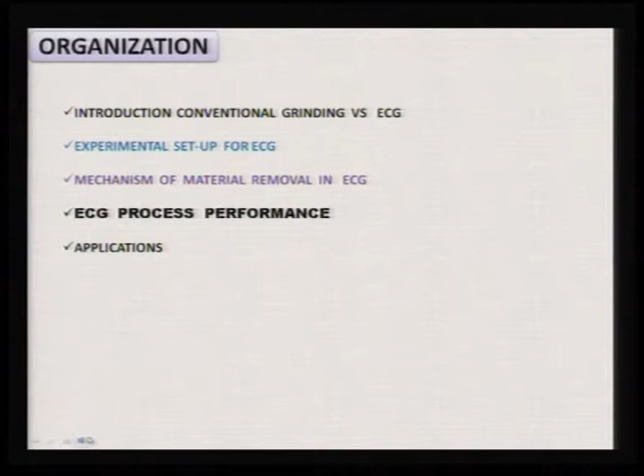Introduction to conventional grinding versus electrochemical grinding.

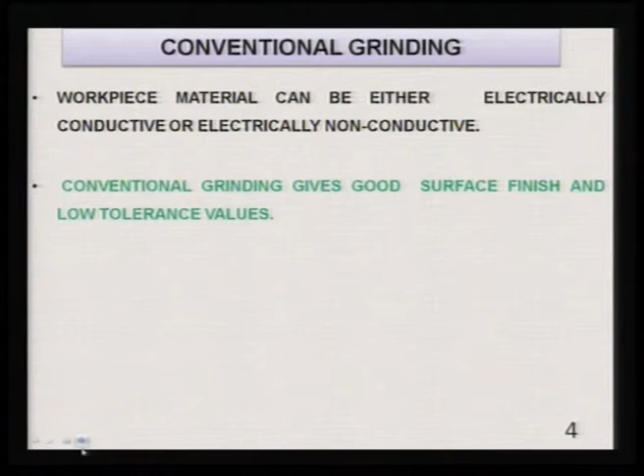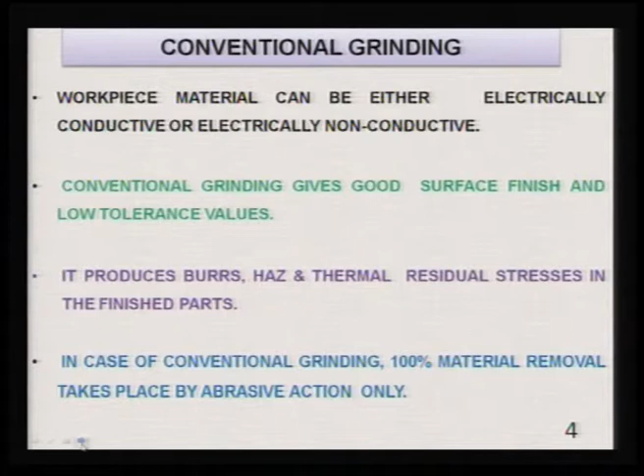In conventional grinding, as we all know, workpiece material can be either electrically conductive or electrically non-conductive. That condition is not required, that the workpiece should be electrically conductive. Conventional grinding gives good surface finish and low tolerance values. It produces burrs, heat affected zone (HAZ), and thermal residual stresses in the finished parts, and the finishing rate is okay. In conventional grinding, 100% material removal takes place by abrasive action only.

In case of electrochemical grinding, as you will see in this figure, on the left side conventional grinding is shown, where you can see rotation of the wheel, workpiece, and depth of cut. On the right side the figure shows electrochemical grinding, where you can see a decreasing electrolyte gap. Here electrolyte is supplied through this nozzle kind of arrangement, and electrochemical dissolution takes place as well as grinding. So both reactions keep going on simultaneously; we will discuss them shortly.

A small mechanical contact arc is partly responsible for the long wheel life experienced by electrochemical grinding users. That means in electrochemical grinding the life of the grinding wheel is much larger than in conventional grinding. You can see here that the contact arc is much larger in case of conventional grinding as compared to electrochemical grinding. That is why the grinding wheel life is much larger in electrochemical grinding compared to conventional grinding.

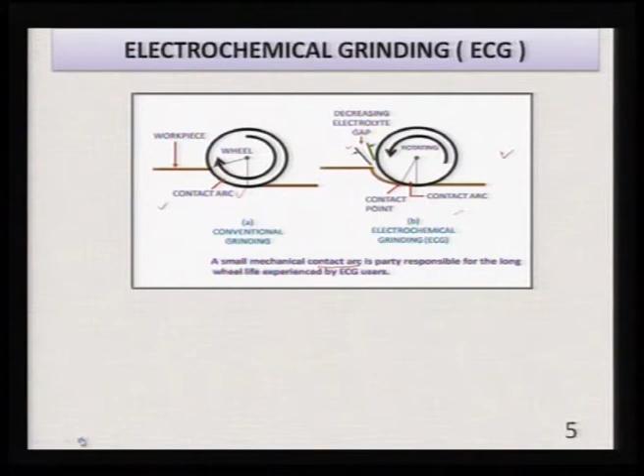In ECG, the workpiece should be electrically conductive. This is the first basic requirement, because as I will show, the workpiece is made... sorry, workpiece is made anode, not cathode, and grinding wheel is made as the cathode. So both grinding wheel and workpiece should be electrically conductive.

Electrolyte is used during electrochemical grinding, and it is supplied with the help of a nozzle as shown on the right hand side of the figure. After proper filtration, the electrolyte can be reused or recirculated, as we do in case of electrochemical machining.

For electrochemical grinding, the wheel bonding material should be electrically conductive, as I just mentioned, since it is made as cathode. So the material should be electrically conductive and it forms part of the electrical circuit of the electrochemical grinding process.

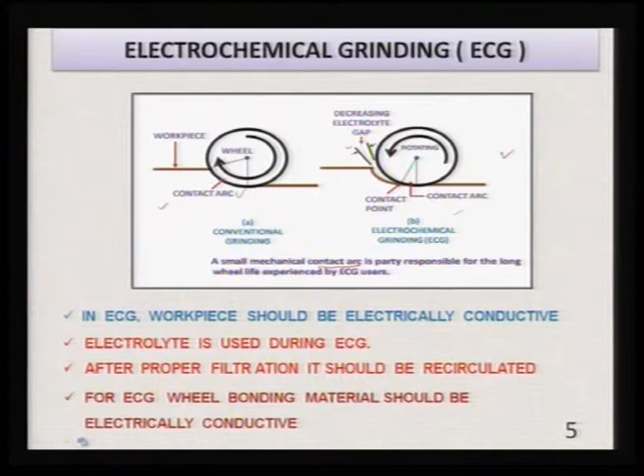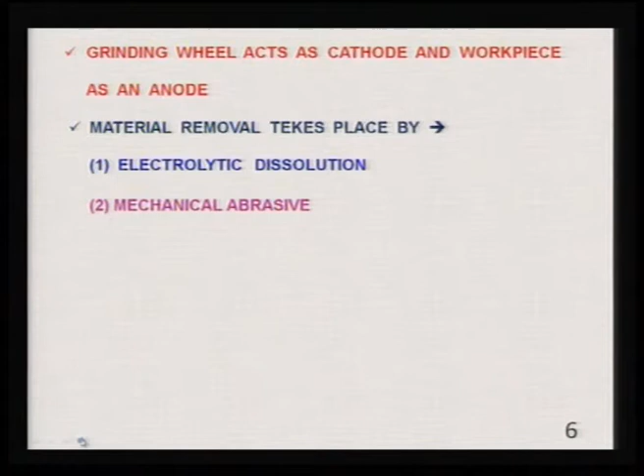Grinding wheel acts as a cathode and workpiece acts as an anode. This is very similar to, or same as, electrochemical machining, where the workpiece is made anode and the tool is made cathode. Here the grinding wheel acts as the tool. Material removal takes place by electrolytic dissolution and mechanical abrasion by abrasive particles, which are part of the electrochemical grinding wheel.

It is found experimentally that mechanical abrasive action accounts for around 10% of total material removal, while the remaining 90% is due to electrochemical dissolution, as compared to ECM where 100% of removal is due to electrochemical dissolution only. Higher wheel life is obtained in electrochemical grinding as compared to conventional grinding wheel life.

Common electrolytes used during electrochemical grinding are the same as used in electrochemical machining: sodium chloride, sodium nitrate, and others can also be used depending upon the combination of tool and workpiece material.

Let us see the experimental setup of the electrochemical grinding process.

Various features of an electrochemical grinding setup are shown here. You will see the electrode, that is the cathode, the conductive or grinding wheel that acts as the cathode, and you can clearly see the protruding abrasive particles which contribute to the abrasive action in material removal. Here the electrolyte, sodium nitrate, is supplied at the inter-electrode gap. Here is the workpiece to be ground, and in this case it is a single point turning tool used as the workpiece.

The workpiece is made anode, as shown, and the grinding wheel is made cathode, connected to the negative terminal of the power supply, while the workpiece is connected to the positive terminal. The workpiece is held on the work table, and the work table and grinding wheel are in the machining area or tank containing the electrolyte.

Abrasive particles are written as insulating abrasive particles, because all abrasive particles—alumina, silicon carbide, etcetera—are electrically non-conductive. So they form a certain minimum gap which does not permit short circuit by contacting the tool and the bonding material of the grinding wheel.

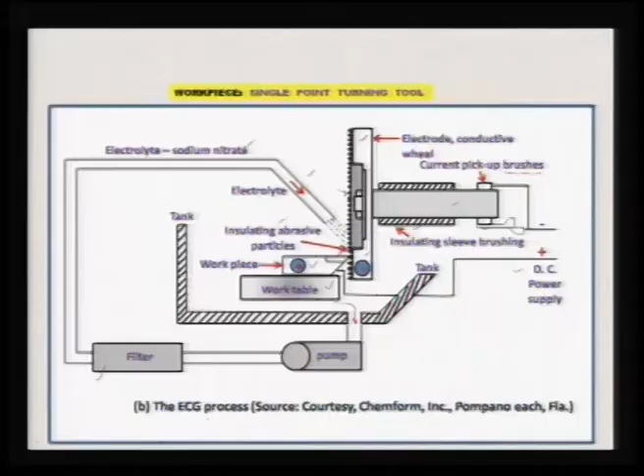The tank is the machining zone where electrochemical grinding takes place. Electrolyte is supplied here with the help of a nozzle between the tool, that is the grinding wheel, and the workpiece. After being used, the electrolyte comes out and is recirculated with the help of a pump, but before recirculation it has to be properly filtered or cleaned using various sizes of filters.

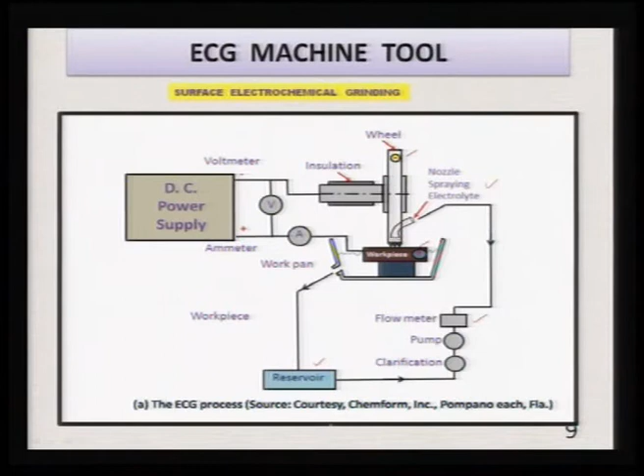Let us discuss briefly the mechanism of material removal in electrochemical grinding. This is a hybrid process, as I have already mentioned in couple of lectures, where we have combined electrochemical machining and grinding, both processes.

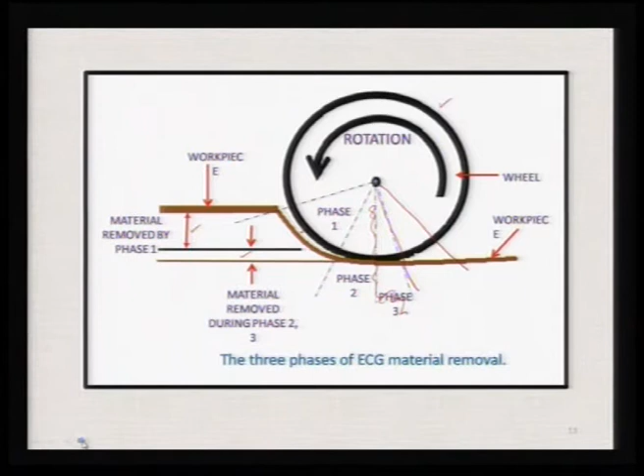The material removed in zone 1 is shown here, where material is removed by electrochemical dissolution only. In zone 2, material is removed by both processes—electrochemical dissolution as well as abrasive action. This clearly gives the picture of the 3 zones: zone 1, zone 2, zone 3.

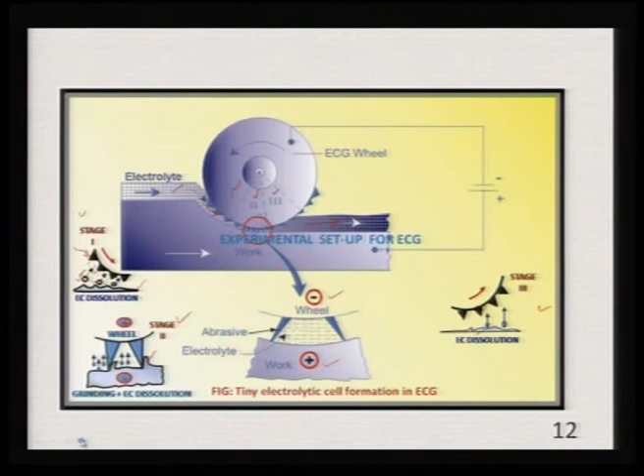But in zone 3, as you see on the right side, there is no contact between the abrasive particle and the workpiece surface; there is only electrolytic dissolution. So material is removed only due to electrolytic dissolution in zone 3, with no abrasive action. The same thing is described in the following slides.

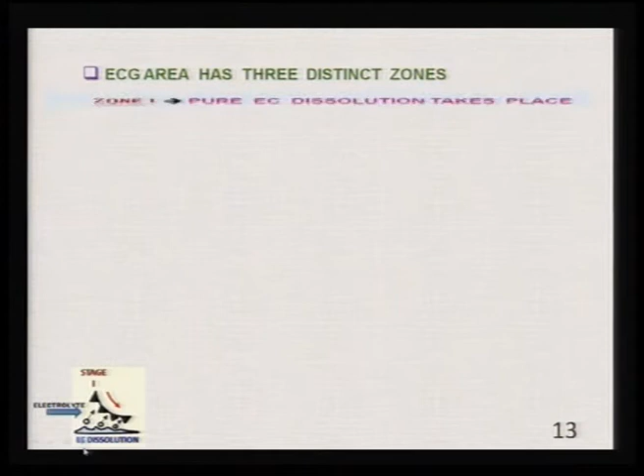ECG has 3 distinct zones, as I have shown you. In zone 1, pure electrochemical dissolution takes place, as you can see in the figure, with no abrasive contact with the workpiece. Wheel rotation helps in drawing the electrolyte into the machining zone, because the wheel rotates in the direction shown by the arrow, so electrolyte is drawn into the gap between the wheel and the workpiece, apart from whatever pressure it is being supplied at.

Then contamination in zone 1 takes place by reaction products and gases, because electrochemical reaction is occurring. So ferrous hydroxide or ferric hydroxide will be formed if iron is being machined. This ferrous or ferric hydroxide, along with the gases evolved—since we know oxygen gas is evolved at the anode while hydrogen gas is evolved at the cathode—all these gases along with the reaction products will move forward into zone 2.

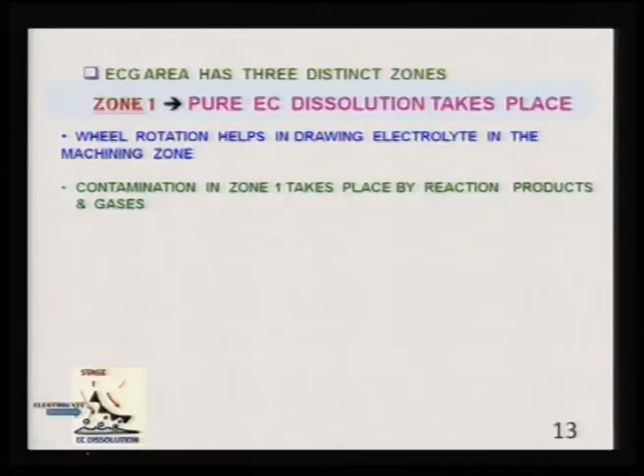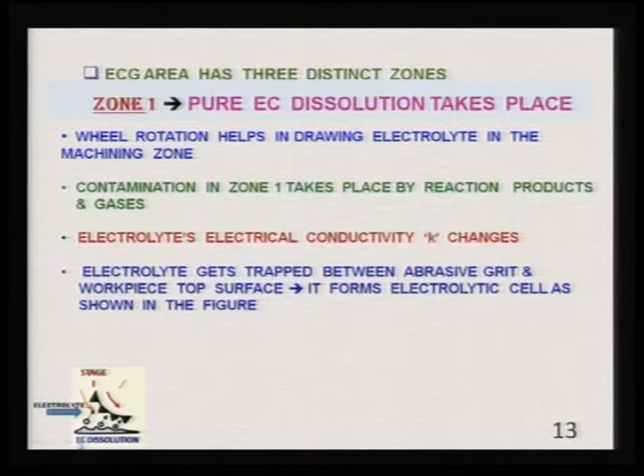Then the electrolyte's electrical conductivity will change, because apart from the pure electrolyte, it now has reaction products as well as gases, and controlling the electrical conductivity of the electrolyte becomes very difficult. Electrolyte gets trapped between the abrasive grit and the workpiece top surface, forming an electrolytic cell as shown in the figure. A small amount of material is removed in this zone, and the inter-electrode gap is comparatively large.

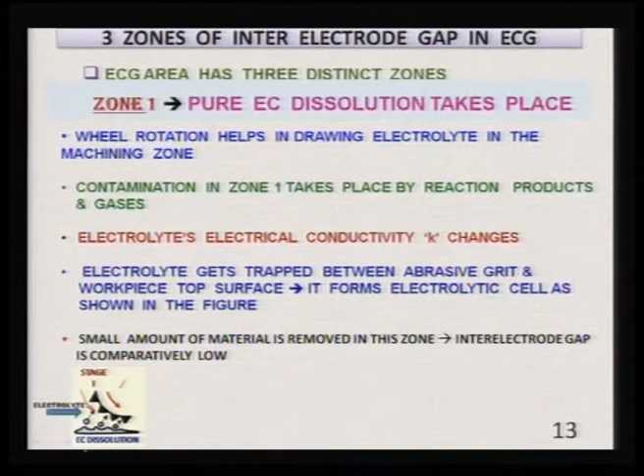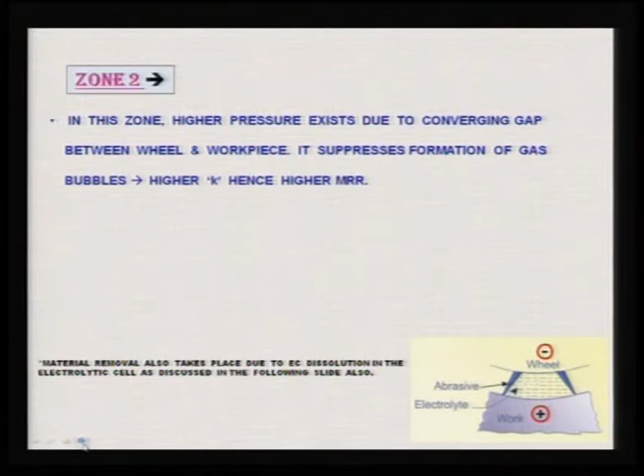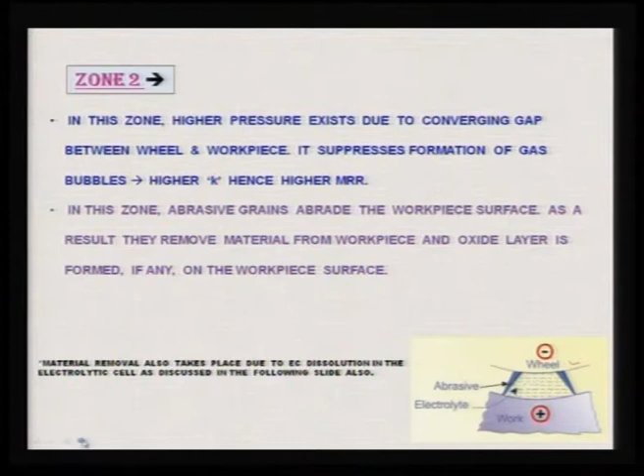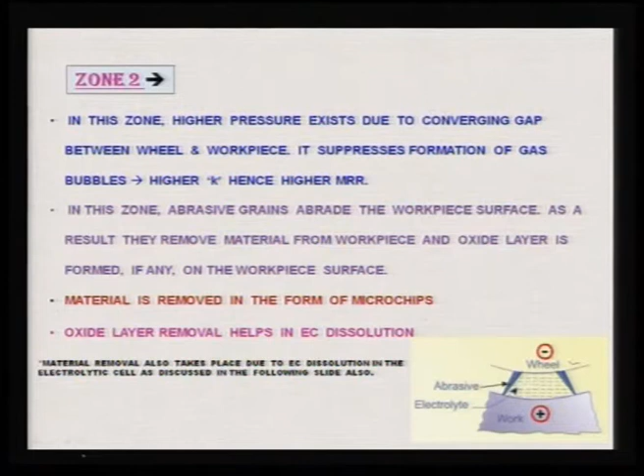In zone 2, abrasive grains abrade the workpiece surface, as you can see in the figure. As a result, they remove material from the workpiece, and an oxide layer is formed, if any, on the workpiece surface. Material is removed in the form of microchips due to abrasive action, and reaction products are formed due to electrochemical dissolution. Oxide layer removal helps electrochemical dissolution—whatever oxide layer was formed in zone 1 is removed due to the abrasive action of the abrasive particles, so the rate of electrochemical dissolution increases. Material removal also takes place due to electrochemical dissolution in the electrolytic cell, as discussed in the following slide also.

Types of electrolytes used in ECM: you can use acidic electrolyte, alkaline electrolyte, or neutral electrolyte—all these electrolytes we have discussed while discussing the electrochemical machining process.

Reactions during electrochemical machining, while using iron as anode and NaCl aqueous solution as electrolyte: electrolysis of water takes place, producing hydrogen gas evolved at the cathode and hydroxyl ions (2OH-). When iron is the workpiece, ferrous ions detach from the workpiece; they have positive charge, and electrons are also detached. Then ferrous ions and hydroxyl ions react with each other to form ferrous hydroxide.

In some cases, under certain conditions, ferric hydroxide can be formed in place of ferrous hydroxide.

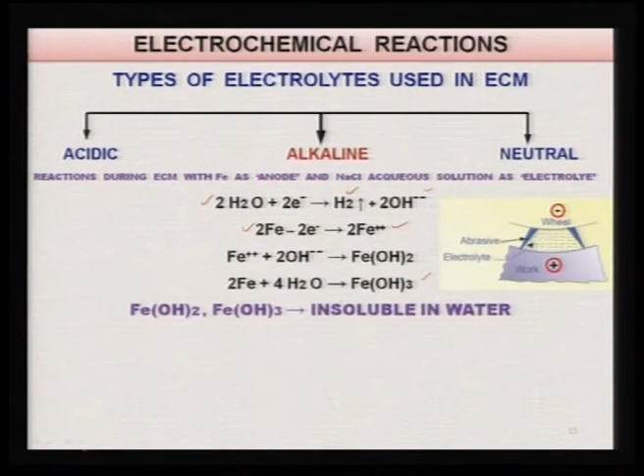Now, this ferrous hydroxide and ferric hydroxide are insoluble in water. So they remain as such, as reaction products in the electrolyte, and positive ions convert as hydroxides, ferrous or ferric, in case of iron as anode or work material.

In this particular case, the inter-electrode gap is quite low and it depends upon the projection of the abrasive particle out of the grinding wheel, normally less than 1 millimeter. The voltage applied is around 8 to 20 volts.

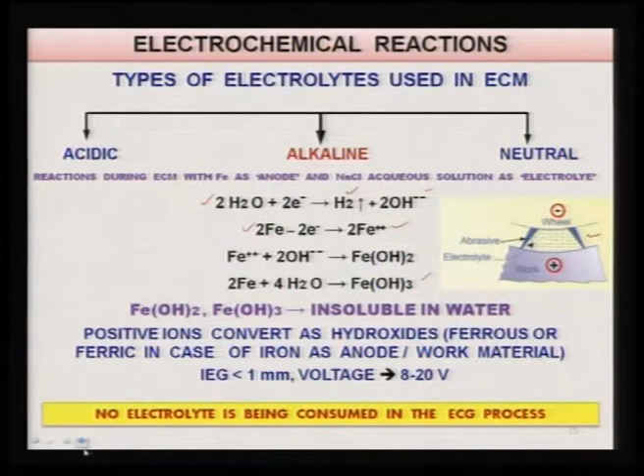We can clearly see from these reactions that no electrolyte is being consumed in the electrochemical grinding process, and this was true in case of electrochemical machining as well.

In zone 3, there is no contact again between abrasive grain and workpiece surface. As you can see, this is the workpiece surface and this is the abrasive grain, and there is no contact between the two. The wheel starts lifting off the work surface, that is why the inter-electrode gap is continuously increasing in the direction of the arrow.

Hence, material removal takes place by electrochemical dissolution only, because there is no physical contact between abrasive particle and the workpiece, so no abrasive action is taking place. Secondly, the rate of electrochemical dissolution will keep decreasing, because the inter-electrode gap is continuously increasing in the direction of the flow of the electrolyte.

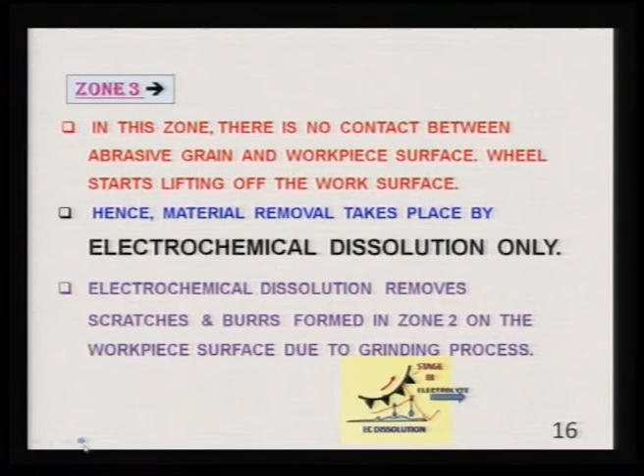Electrochemical dissolution removes scratches and burrs formed in zone 2 on the workpiece surface due to the grinding process. We saw earlier that material was removed by abrasive particle from the workpiece surface in the grinding process, causing burrs and scratches, and these are removed in zone 3. So you get a burr-free and scratch-free surface after zone 3 in electrochemical grinding. This is an additional advantage over conventional grinding.

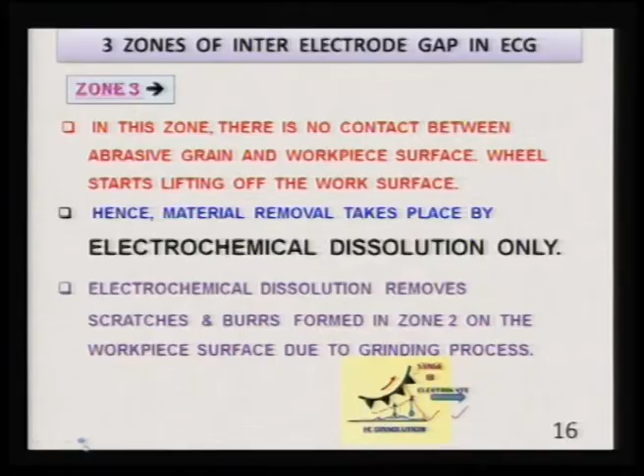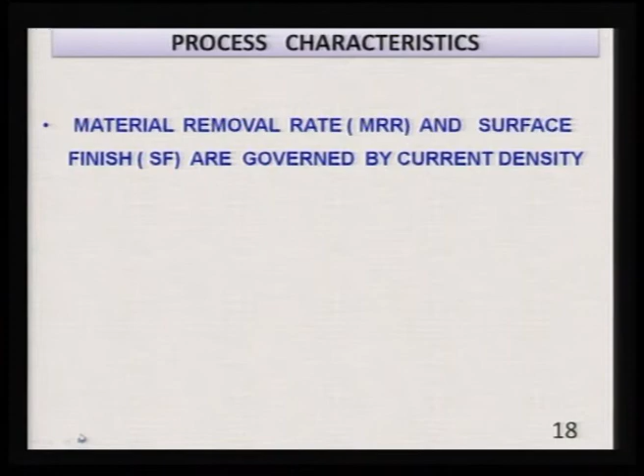Now, electrochemical process performance. Material removal rate and surface finish are governed by current density, as in case of electrochemical machining, because 90% of the total material removed in electrochemical grinding is due to electrochemical dissolution. That means current density is going to govern the material removal rate.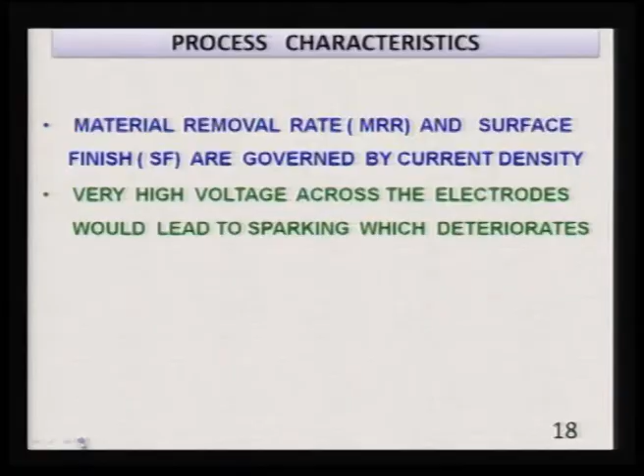Very high voltage across the electrodes would lead to sparking. So we should not use very high voltage between the two electrodes, the grinding wheel and the workpiece, otherwise sparking will take place, and this sparking will damage both the grinding wheel and workpiece, which is undesirable. It will also deteriorate the surface finish.

In case of electrochemical grinding, it should be ECG, not EGC. MRR can be as high as 10 times that of conventional grinding on hard materials having hardness greater than 65 HRC. 10 times greater MRR is a very high value compared to conventional grinding, so this is an additional advantage of electrochemical grinding.

Now, you have to control the machining conditions appropriately in electrochemical grinding also, and feed rate is one of the important machining conditions. If the feed rate, calculated from the formula given in the theory of electrochemical machining, is higher than required, then the abrasives detach prematurely due to higher depth of cut, which leads to excessive grinding wheel wear, giving low wheel life and higher cost.

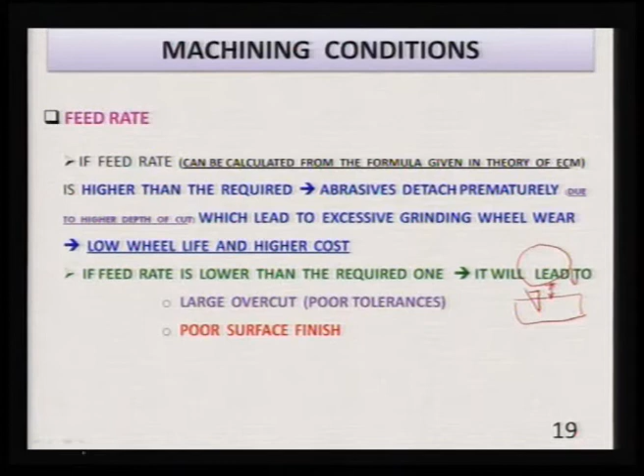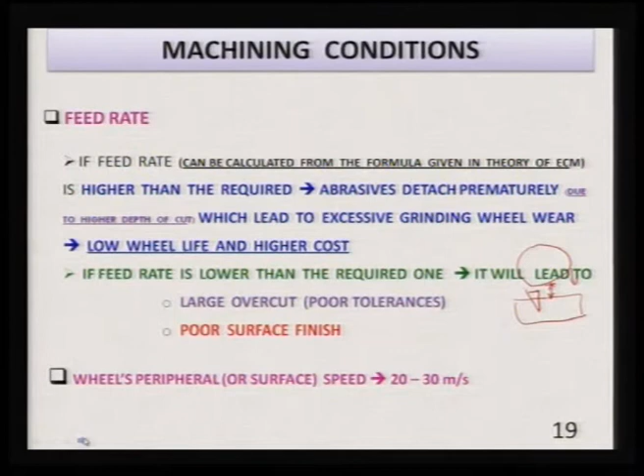And the wheel's peripheral speed normally is 20 to 30 meters per second in case of electrochemical grinding.

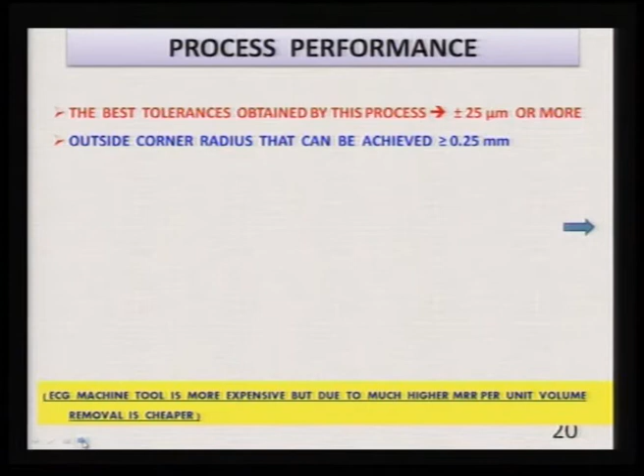Process performance continues. The best tolerances that can be obtained by this electrochemical grinding process are within plus minus 25 micron or more. Outside corner radius that can be achieved by electrochemical grinding is greater than or equal to 0.25 millimeter, that is 250 micron.

Inside corner radius that can be achieved is again the same, 0.25 millimeter, greater than or equal to 0.25 millimeter. Surface roughness that can be obtained is approximately 0.12 to 0.8 micron, it lies in this particular range.

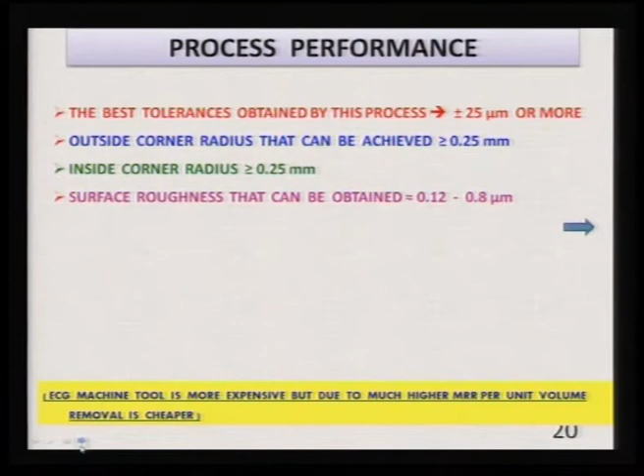Surface obtained after electrochemical grinding is free of burrs and scratches, as already explained in the earlier slide, because burrs and scratches get dissolved in zone 3 of the electrochemical grinding process by electrochemical dissolution.

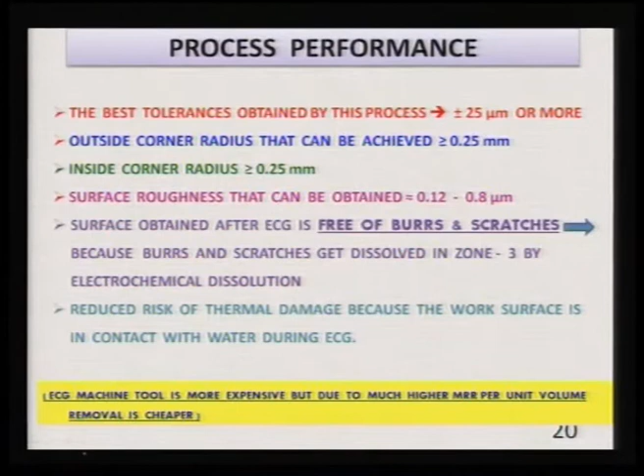Reduced risk of thermal damage, because the workpiece is always in contact with the electrolyte during electrochemical grinding, which is a solution like sodium chloride or sodium nitrate in water, and water is a very good coolant. So the temperature of the workpiece does not rise to a large extent, and there is hardly any thermal damage risk.

ECG machine tool is more expensive compared to a normal grinding machine, but due to much higher material removal rate per unit volume, removal is cheaper. Hence electrochemical grinding is cheaper than conventional grinding, especially in case of grinding very hard materials. So the cost of electrochemical grinding is less than the cost of conventional grinding.

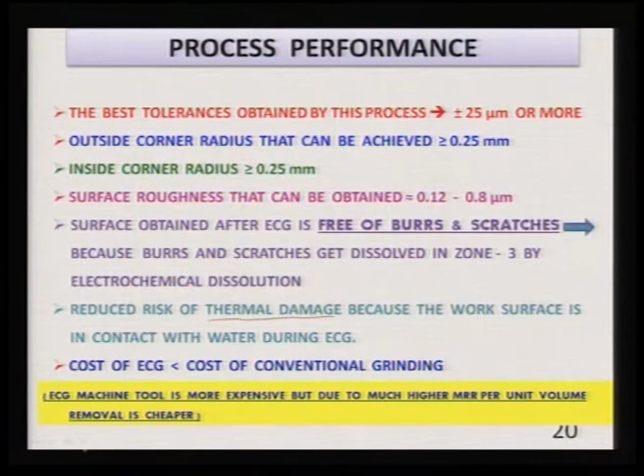The electrochemical grinding machining chamber should be made of non-corrosive and electrically non-conductive material. Power supply to the grinding wheel is given with the help of brushes, as shown in the earlier slide of the setup. However, in some cases you can use mercury coupling that can carry more current compared to brushes, but it depends on the designer.

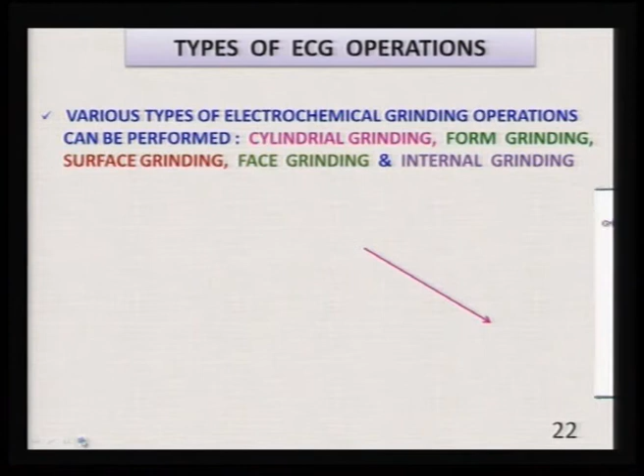Types of ECG operations: various types of electrochemical grinding operations can be performed, such as cylindrical grinding, form grinding, surface grinding, face grinding and internal grinding. You can see here clearly this is the surface grinding operation, some setup is shown.

Surface grinding is slow because of a small area of contact between the workpiece and the grinding wheel, as you can see here — it is theoretically a line contact. So the total contact area of the grinding wheel is very small, hence material removal rate and finishing rate are also low.

In case of face grinding, it is the fastest because of the largest area of contact between the workpiece and grinding wheel.

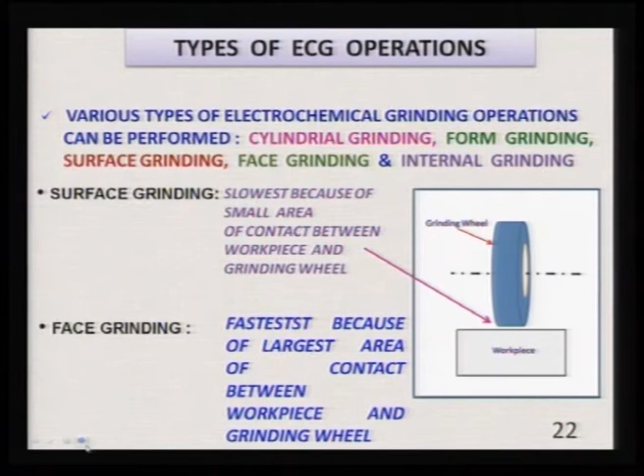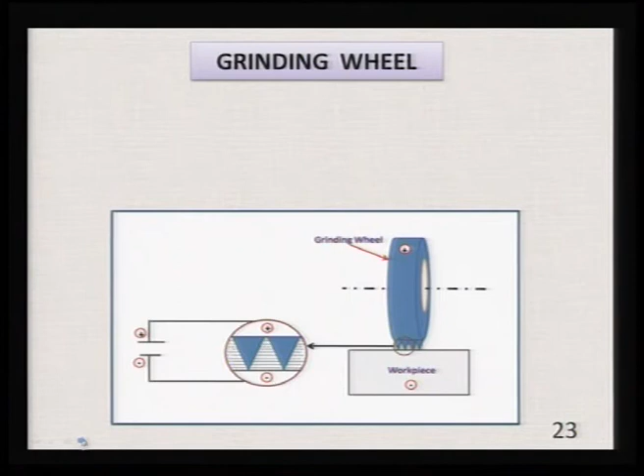Now here you can see the bonding material used for bonding the abrasive particles in the electrochemical grinding wheel, as shown over here. The bonding materials are copper, brass, nickel, because they should be electrically conductive. These materials have good electrical conductivity, so they are commonly used as bonding material for the electrochemical grinding wheel.

Now you can clearly see the role of the abrasive particles in surface grinding. These abrasive particles remove material by abrasion, while this forms the electrolytic cell. Because of this electrolytic cell formation, material is also removed due to electrochemical dissolution from this area, and the abrasive particles remove material by chip formation.

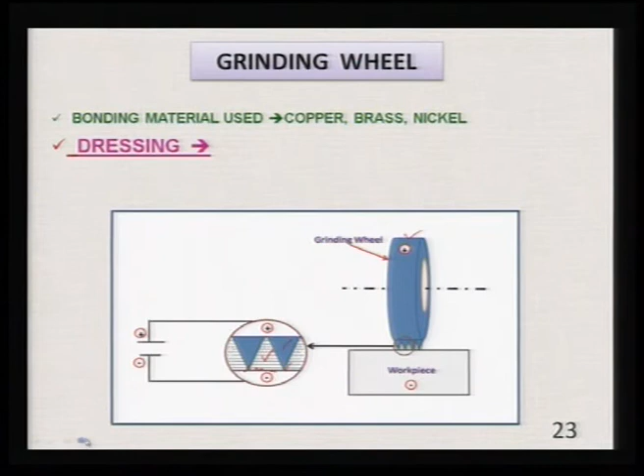Dressing is very important. It takes a lot of time to dress grinding wheels, and it costs a lot in the case of conventional grinding wheel dressing.

Now what is done in case of electrochemical grinding dressing? As you can see, earlier the grinding wheel was made the cathode, but in this particular case the grinding wheel has been made the anode, and the workpiece has been made the cathode. Now, material is removed from the anode, so in this case material will be removed from the grinding wheel which is made as anode.

As a result, whatever material was deposited on the grinding wheel due to clogging is removed, allowing fresh particles to project for the grinding operation. So that material is dissolved from the grinding wheel, and once it is dissolved, fresh abrasive particles project outside the grinding wheel and perform the grinding operation rather than the blunt abrasive particles — which get pulled out of the wheel — giving better performance of electrochemical grinding once dressing has taken place.

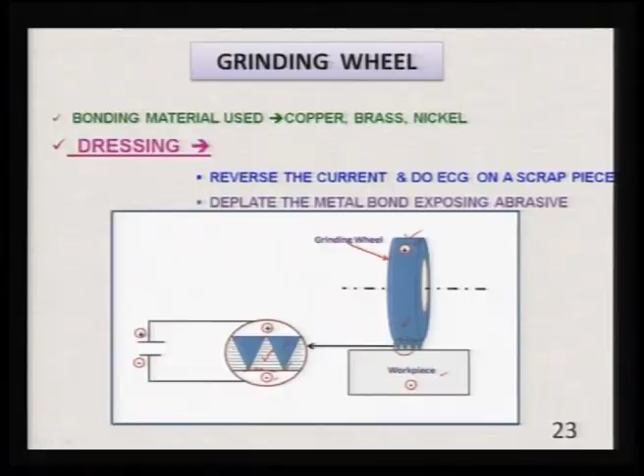Economical in grinding carbide cutting tools.

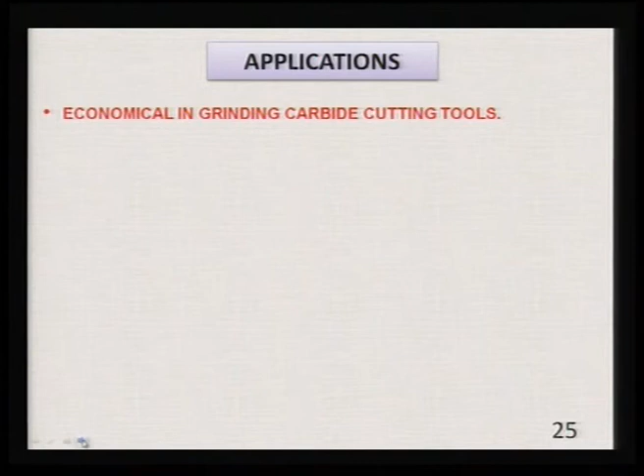Electrochemical ground cemented carbide workpieces have no damage to the microstructure, and hardly any micro cracks are created. For reprofiling worn locomotive traction motor gears, this particular process has been used. There is no effect on gear hardness when you are grinding or finishing the gears by electrochemical grinding operation; hardness is not affected or changed.

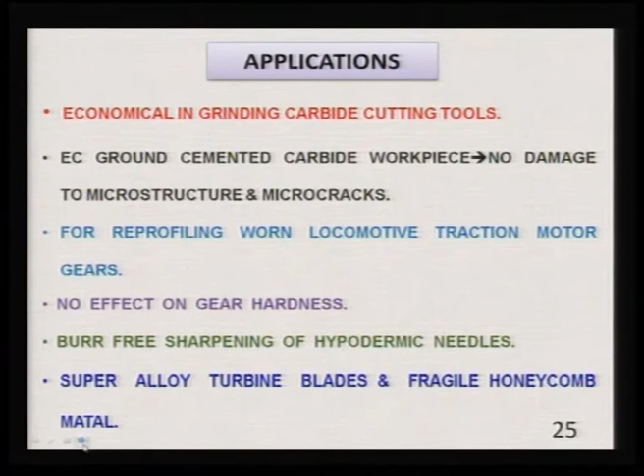You get the burr free sharpening of hypodermic needles, which is very important. Even a single burr in this needle will create a lot of pain to the patient. Superalloyed turbine blades and fragile honeycomb metal can also be ground by this particular process.

It is also concluded that fine grades and low concentration wheels show a tendency to draw more current, and thereby give higher material removal rate than coarse grades and higher concentration grinding wheels.

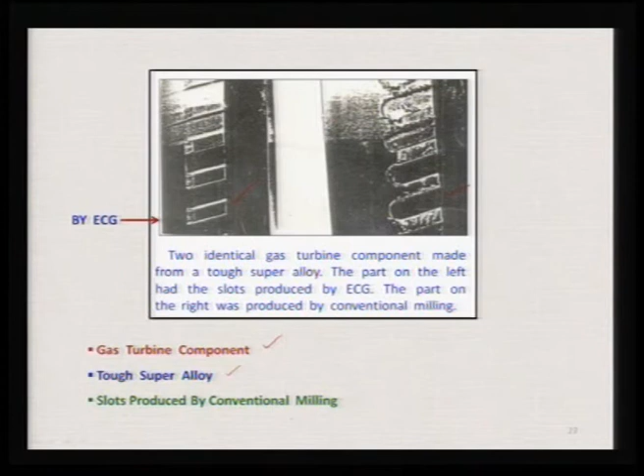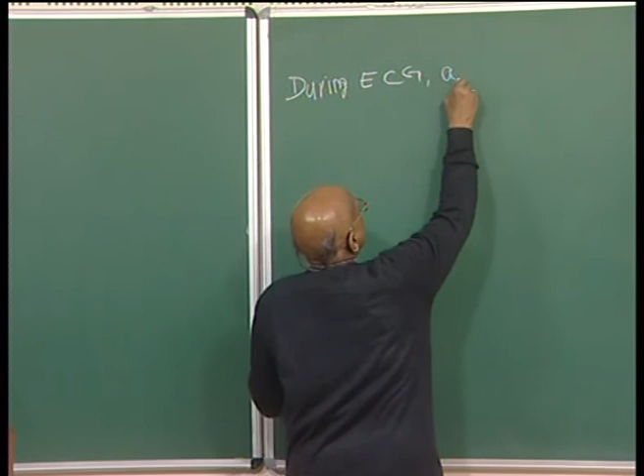Now let us take one numerical example related to the grinding process. I will write here on the board: during electrochemical grinding, a workpiece is ground with the following data.

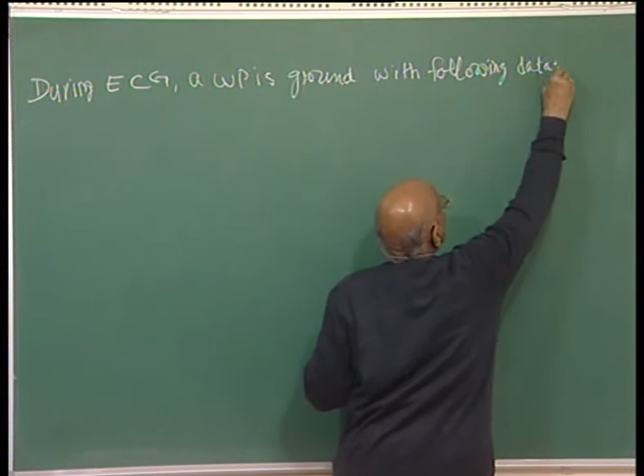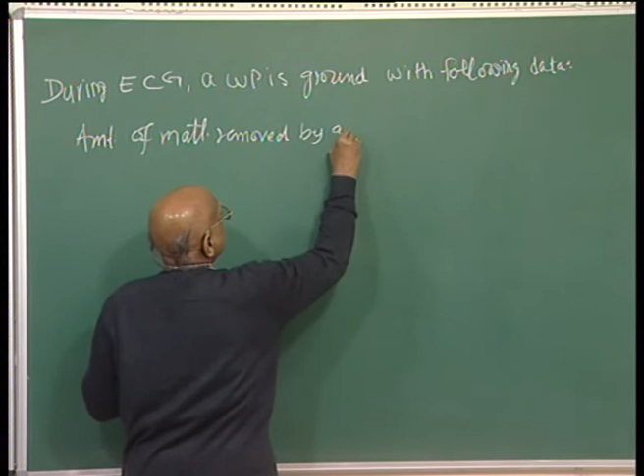Amount of material removed by grinding operation alone, by abrasive action, is one gram. Total amount of material removed by ECG, electrochemical grinding action, is 11 gram. E value of the workpiece, chemical equivalent, is 28 gram. Current being supplied, I, is equal to 20 ampere.

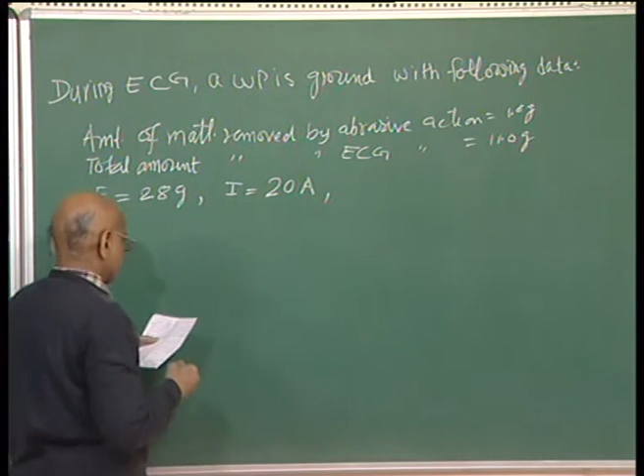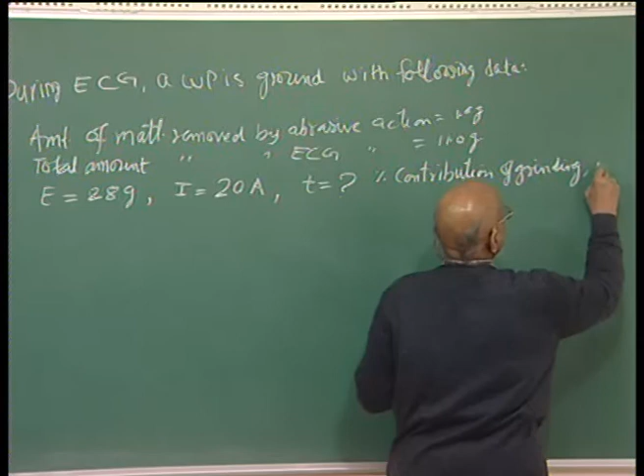Now with this data, find out the time T for electrochemical grinding, and then percent contribution of grinding, percent contribution of grinding in ECG, and MRR in ECG. Solution.

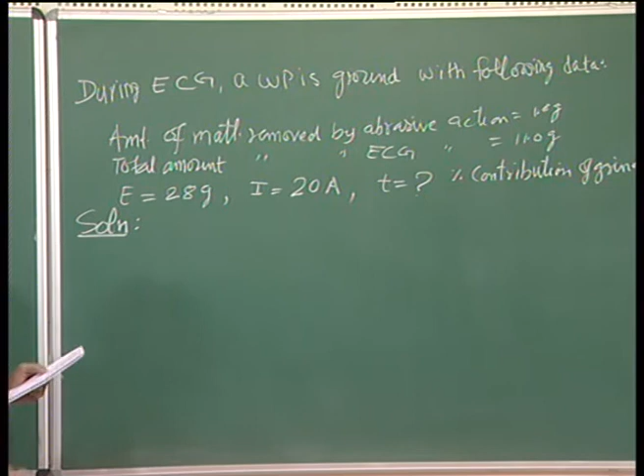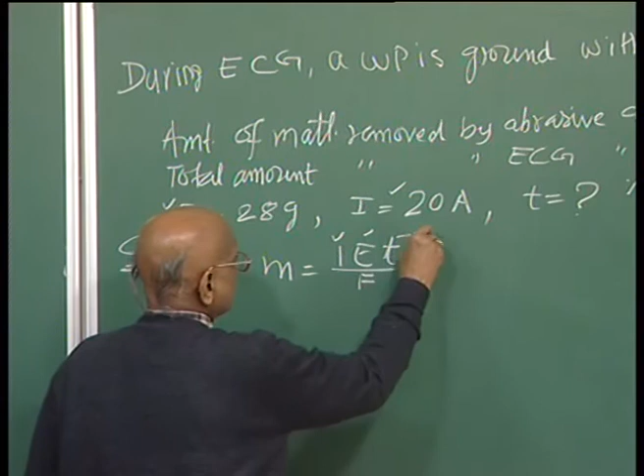We know the formula from Faraday's law of electrolysis that M is equal to I E T, where I is the current in amperes, E is the chemical equivalent of the anode material, that is the workpiece, which is 28 gram, T is the machining time which we have to find out, and F is the Faraday's constant, which is 96,500 ampere second.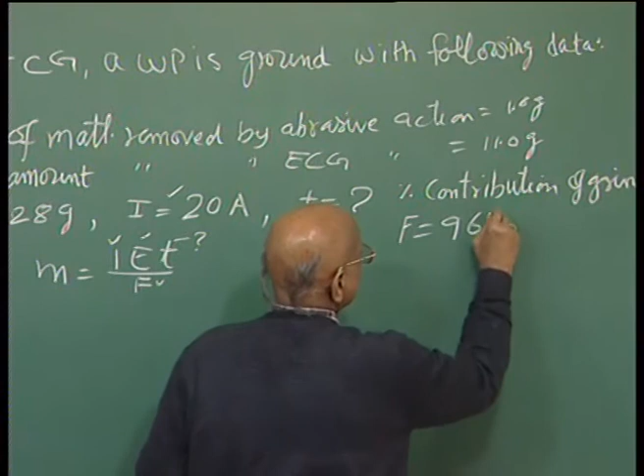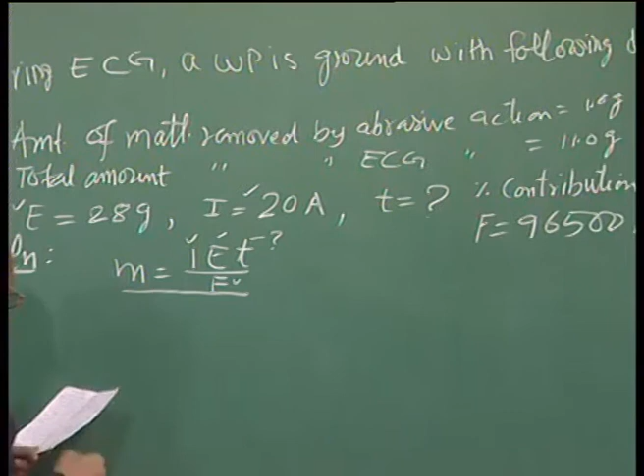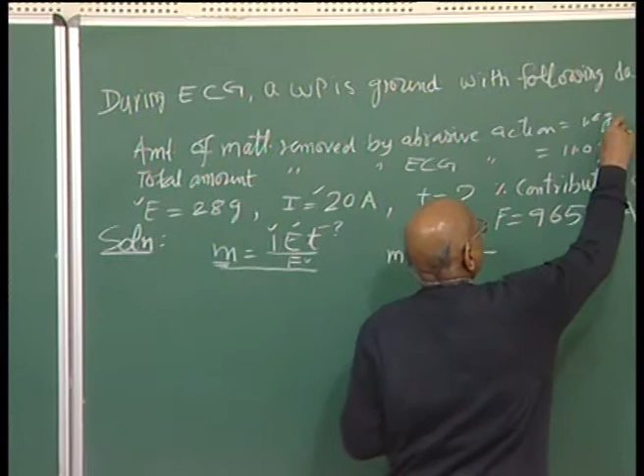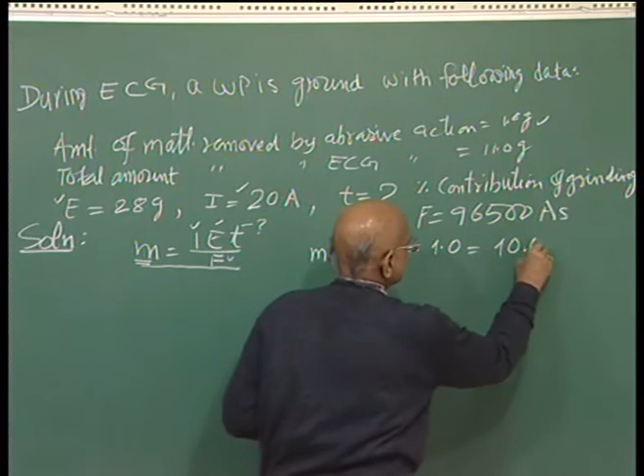Now let us use this formula for finding out the time. This M is the electrochemical dissolution contribution to total ECG. So we will calculate this. What is this value of M? M is equal to 11 gram, the total material removed in electrochemical grinding, and 1 gram is the amount of material removed due to the grinding operation, or abrasive action. So it becomes equal to 10 gram as the contribution of electrochemical dissolution in the electrochemical grinding process.

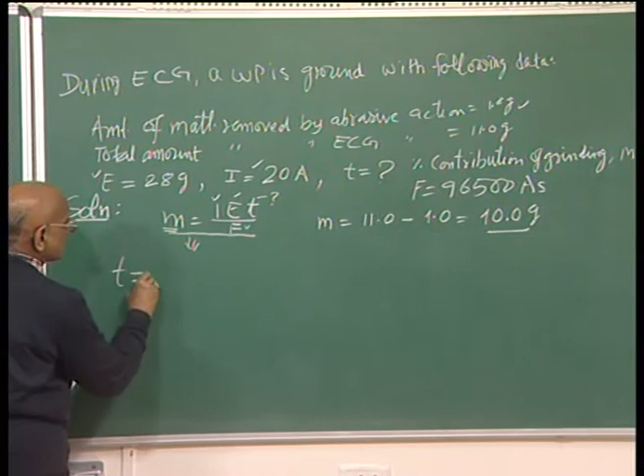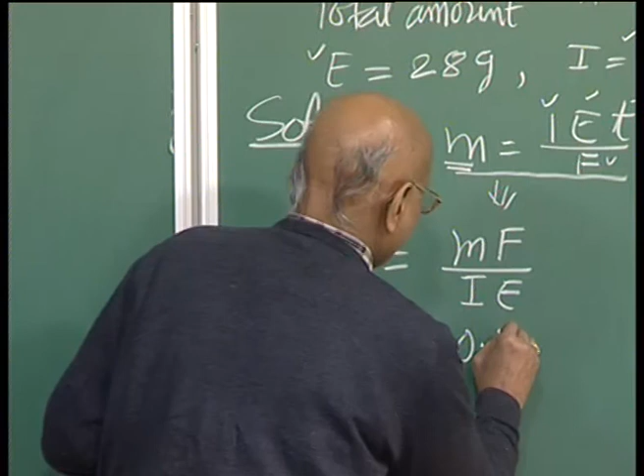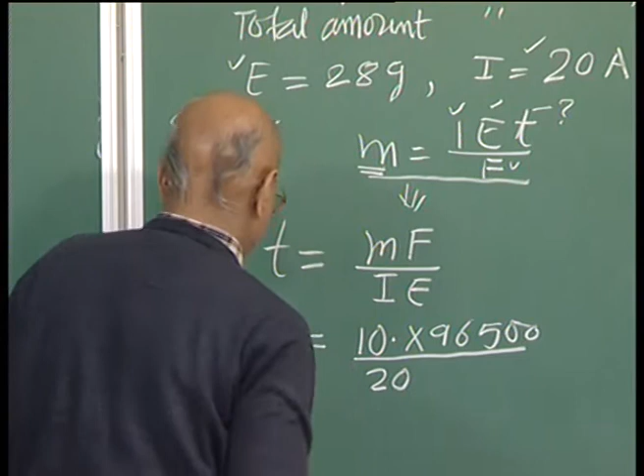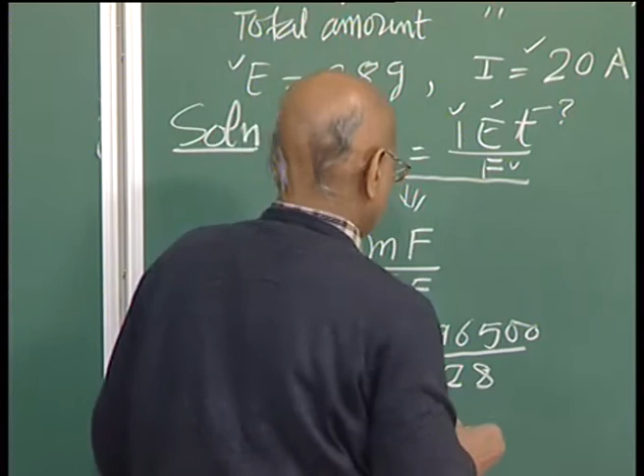So from here we can write down T is equal to M F divided by I E. We already know the values: M is 10, F is 96,500, I is 20 amperes, and E is given as 28. If you simplify this, it will give you approximately 1723.2 seconds. So it is quite slow in this particular case, because the current flowing in the electrochemical grinding process is quite low, so it is taking quite a long time.

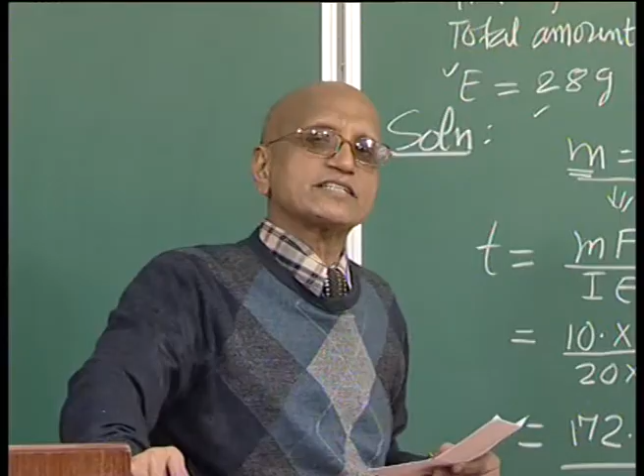Now the next question is: what is the contribution of grinding alone in percentage? So we can write down that was 1 gram divided by 11, into 100. You can calculate that will come out to be approximately 9%. So it indicates that grinding contribution in this particular case is just 9%, while electrochemical dissolution contribution comes out to be 91%, which is quite high.

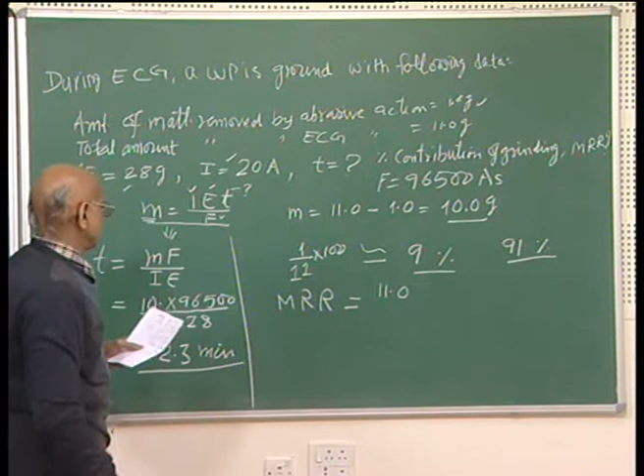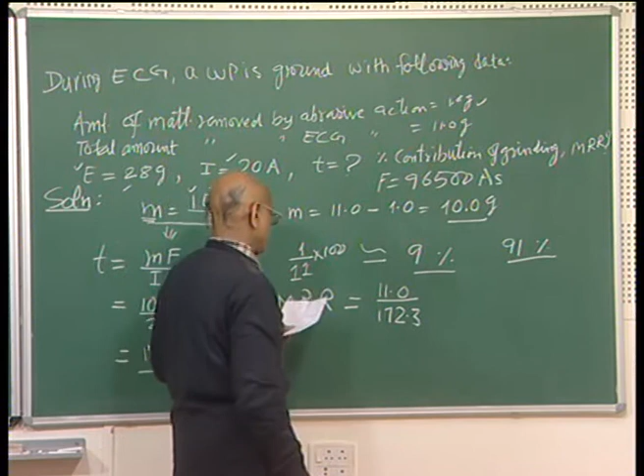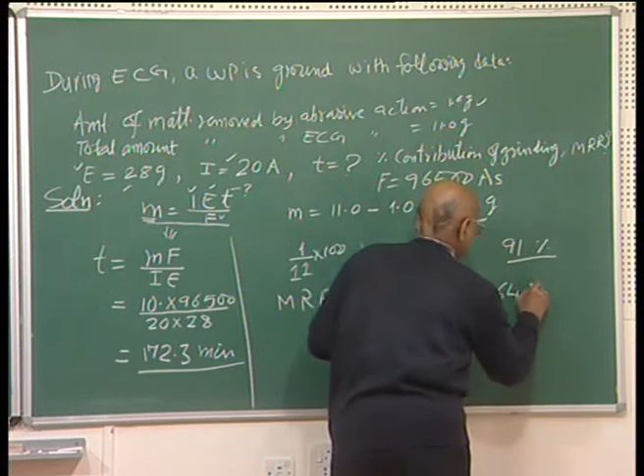Now we can also calculate material removal rate. In case of ECG, we know 11 gram is the amount of material removed, and total time taken is 172.3 minutes. So we can divide it: 11 divided by 172.3. This will give you approximately 0.064 gram per minute.

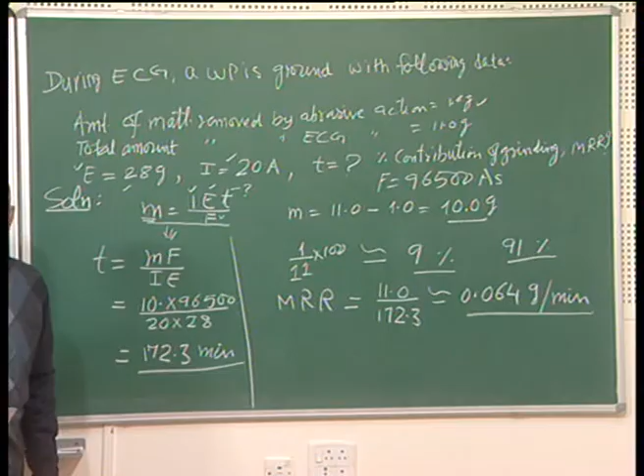Now a very important point to note here is that in grinding operation we are more concerned with finishing rather than really removing a large amount of material. So we do not want a very high material removal rate, as opposed to electrochemical machining, where the objective is to shape and size the workpiece, and large amount of material is removed with high material removal rate needed. So, using the same principle as in electrochemical machining, you can calculate the electrochemical dissolution contribution, and the rest will come out to be the amount of material removed by abrasive action, and you can solve different kinds of problems. Thank you very much.